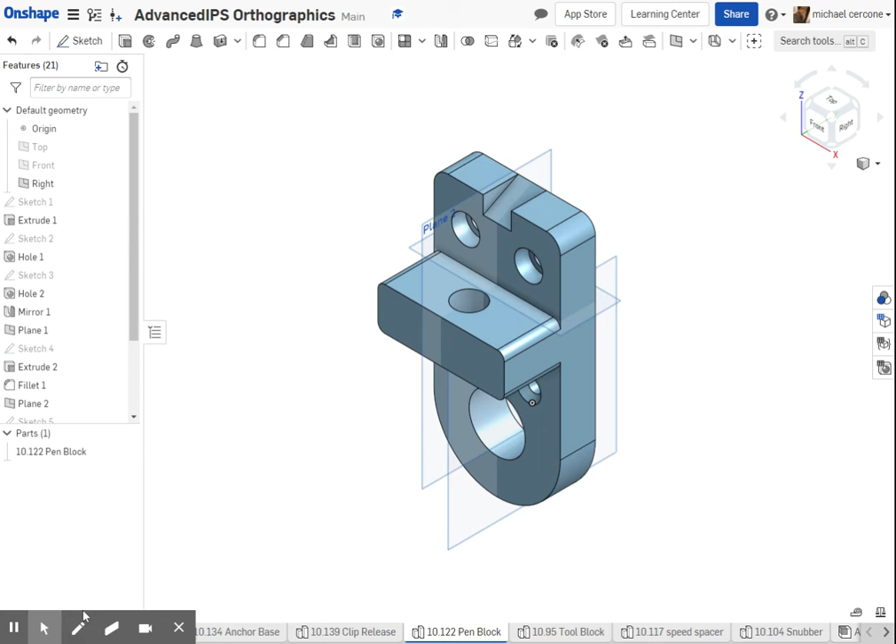You want to have the part actually named. Then when you get into your sheets and rebuild, this is all review right now, it'll show up here with the changed name. I am expecting the exact names now, so you might as well start doing this, so it has the proper name.

Tangent edges need to go away on everything. You can select all three views, all four at once, right click and choose tangent edges, hidden. Takes them away all at once.

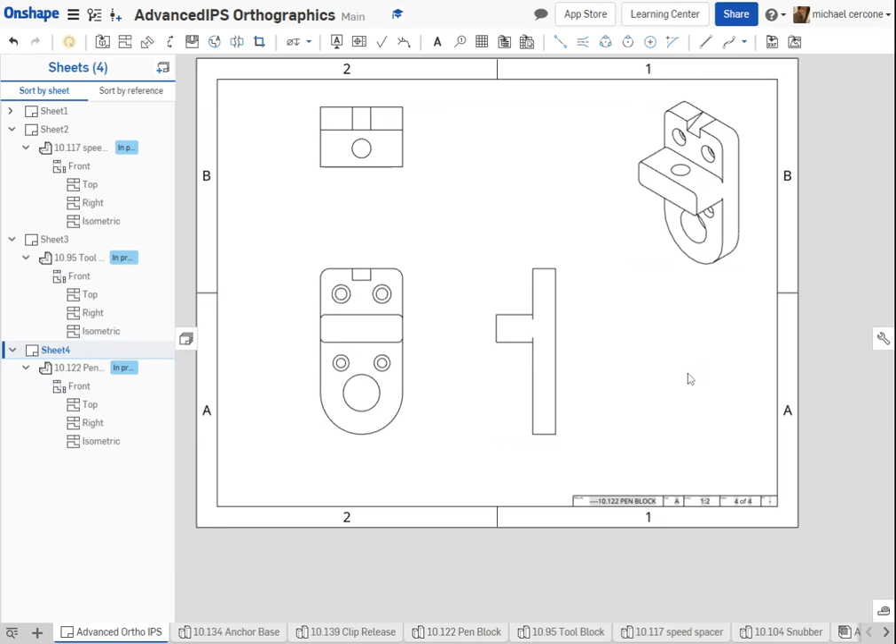Now I'm selecting all three of these views, right clicking, show hidden lines. Here you could actually see the counterbore and the countersink, what they actually look like. As I was saying, the countersink tapers from a large diameter to a small diameter, it looks like a funnel. The counterbore goes large diameter, small diameter.

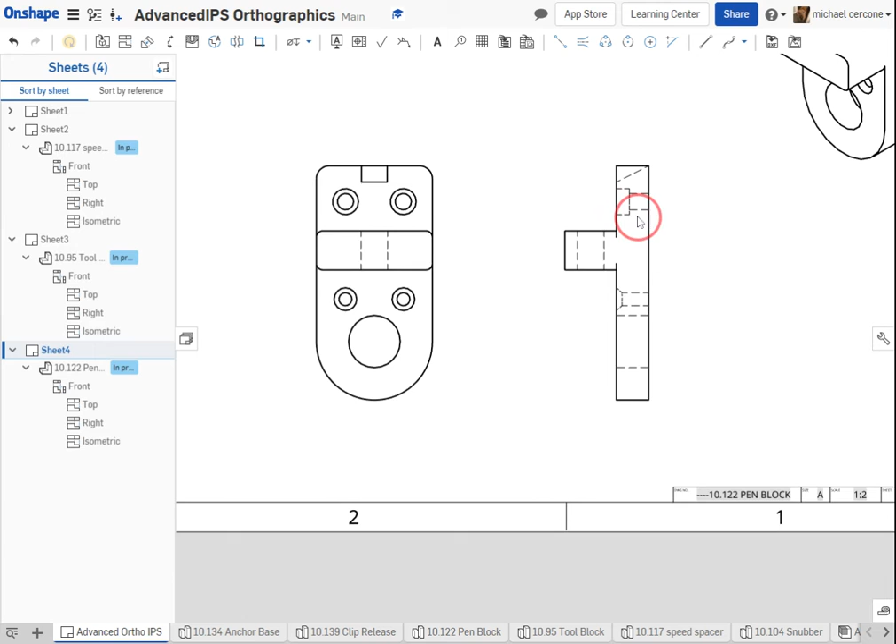To properly dimension these, you should have all of your center lines and hidden lines in first. I am going to change center lines a bit. I'm going to use this 2-point center line and draw across the quadrant to quadrant of these holes.

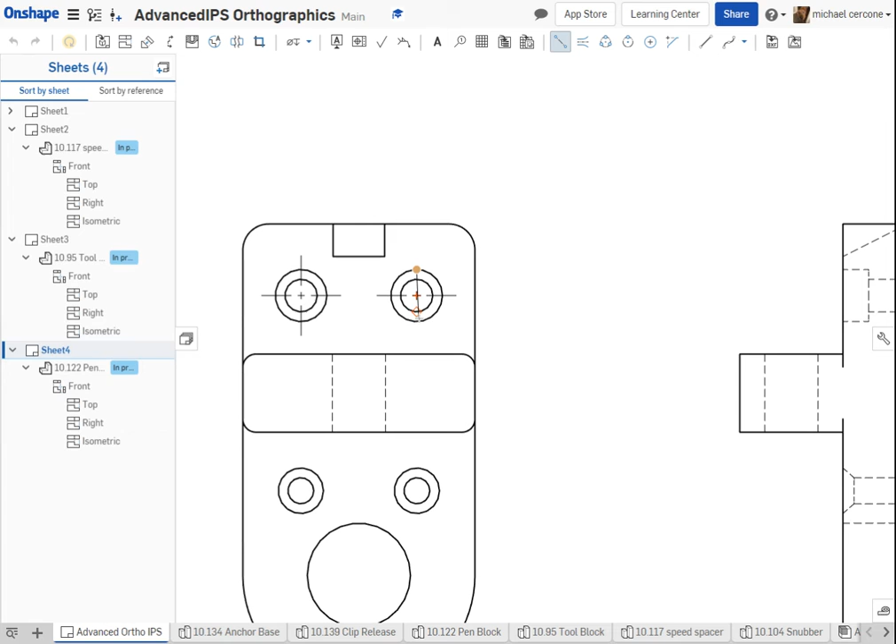Now I could stay in this one, or I could use the 2-point or edge to edge center, which allows me to select here. There are all my center lines. I need them here now.

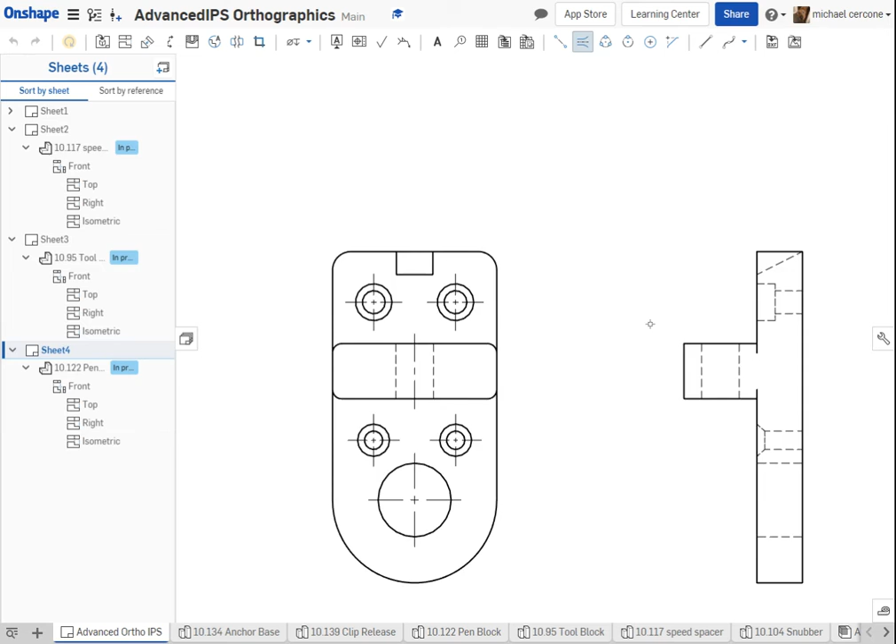Yes. When you have a hole going through and you're looking at it this way, it's a center line. These are center marks.

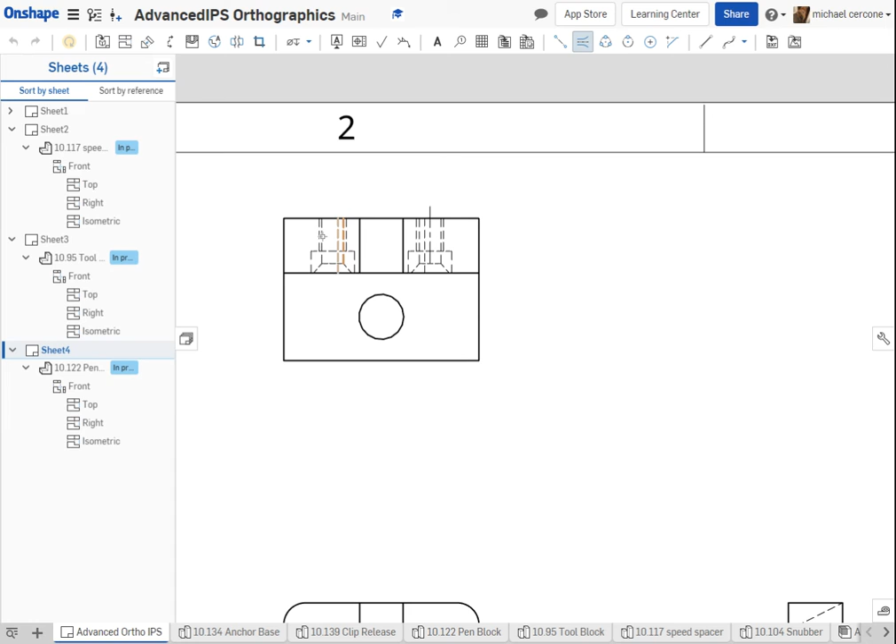I'm going to need these across the top as well, going back to my 2-point center line. So I'm drawing across each one. I've pretty much provided all of these. This would need to be extended out of the part.

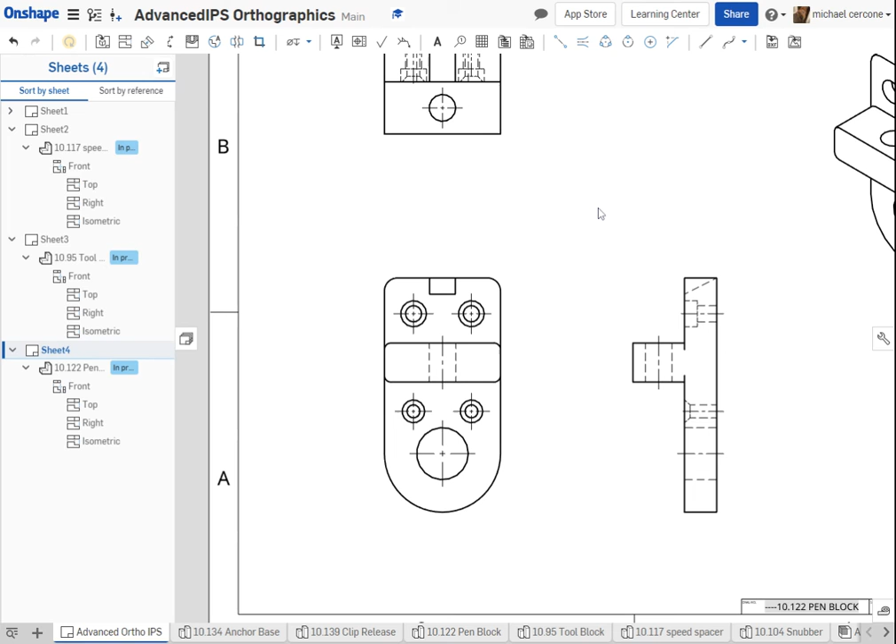So there are my center lines drawn in place over the holes. Before we were using center marks, I told you I was going to change this as we moved on. Everything is going to continue to advance as we move through our sheets to make them more professional.

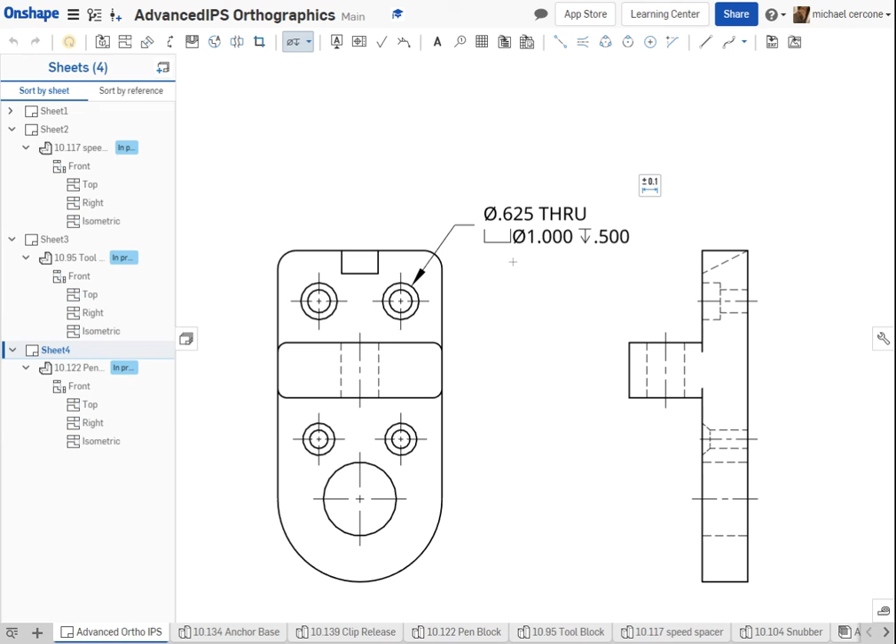You already know how to apply regular dimensions using the hole callout. So I'm going to the dimension tool, selecting the drop down, choosing hole callout. If I now select my counterbore, because I used the hole tool, it types in all of the text for me. So here's my counterbore, here's my countersink.

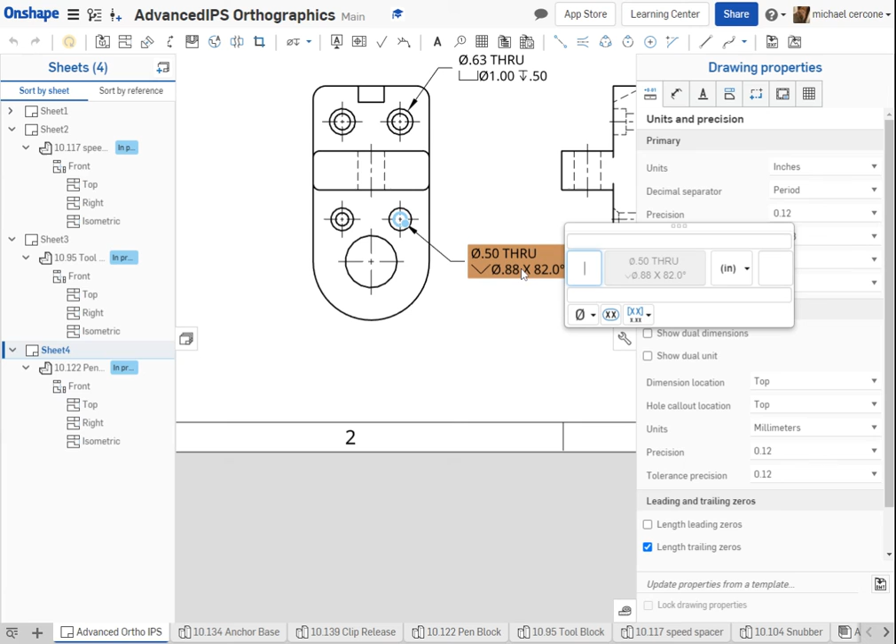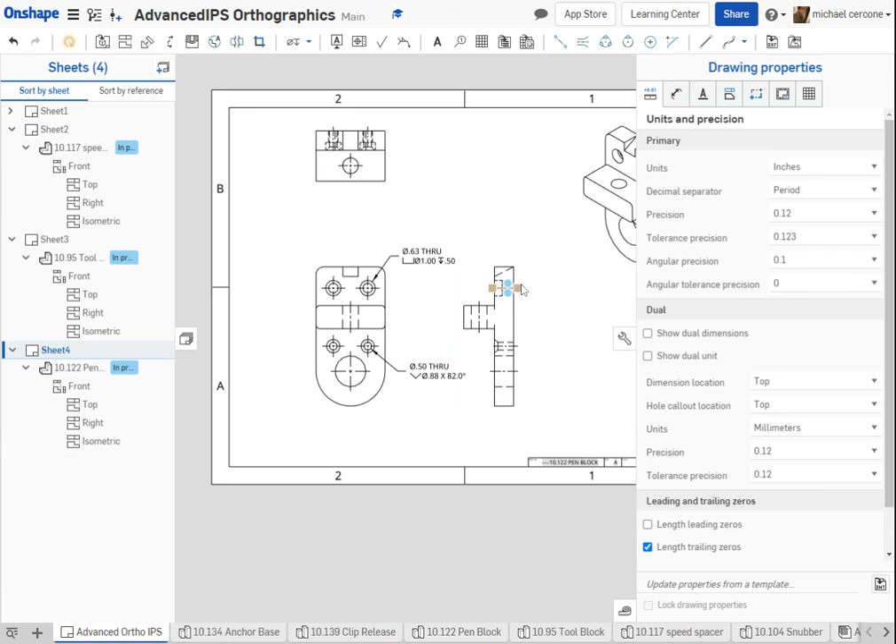I would recommend at this time taking what you have and putting it in the sheet and practicing using the center line and the hole callout. Because any change you make to this part later, when you press rebuild, it will adapt your sheet. Remember, there's that parent-child relation between your sheet and the actual part, so if you make the change on the part, it will adapt on the sheet.

So please try to set these up. Try to draw on your center lines. I will leave this on the screen for you guys to view, and I will post this video.